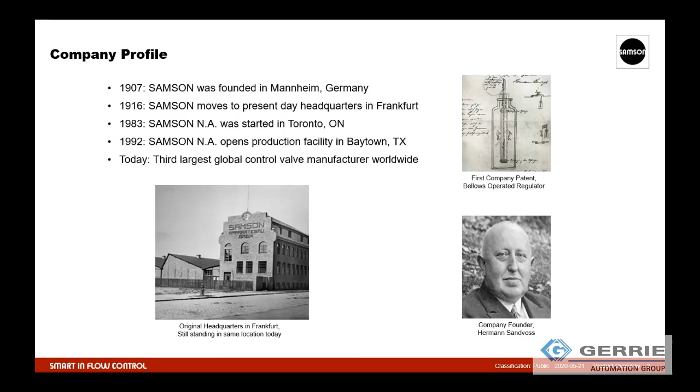From a production standpoint, again, being able to take care of the North American market, we realized that we need more ANSI flanges, for example, than DIN flanges. We need more CSA products than European approvals. So as such, they opened up a production facility in Baytown, Texas in 1992. So a lot of the products that we bring into Canada right now come from either Germany or from the US, from Baytown, Texas. To date, we are the third largest global control valve manufacturer worldwide.

So we're an independently owned company, and again, we're a worldwide company. I always like to mention this for a few reasons. One thing is that we're not a new company. As I said, we've been around for over 100 years now. We're very stable, even in the current marketplace economic situation that we're in, we're still a very stable company.

But what's also important is that if you have equipment that you as a customer or your customer's manufacturing that's going into another country, we have Samson subsidiary offices around the world, in China, Russia, Europe, India, Africa, Australia. So the reason why I mention this is we see it all the time. Equipment comes over here and we're able to service it. It comes in from Europe or China, and we're able to service it for our customers, and vice versa.

We had a situation last year where a customer had built a product on a skid here, sent it off to Romania. They had an issue with it, and we were able to contact that subsidiary office in Romania, have them send a technician to take care of the valve.

We started in Europe, obviously, and as such, some of our core competencies and strengths revolved around that market. So chemical, petrochemical, oil and gas, refinery, industrial gases, these are things that we've been doing for many, many years. So if you think of liquid natural gas, for example, and the industrial gases and cryogenics, that's something we have very specific valves that work on.

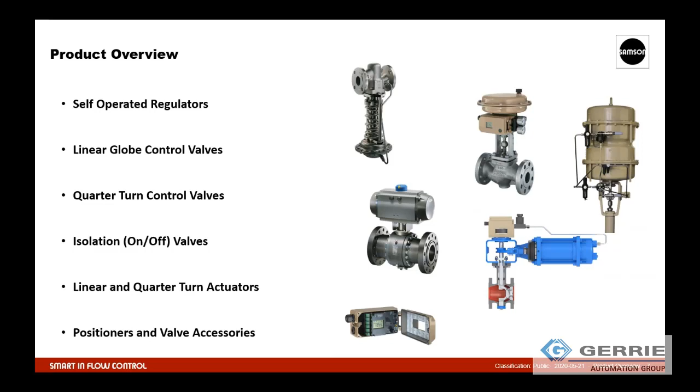So just to give a brief product overview, these are some of the points that I'm going to touch on as we go through this. Self-operated regulators; linear control valves, why are we still using them? Quarter turn control valves, what are the applications for them, the differences between them and linear? Isolation valves, linear and quarter turn actuators, and finally positioners and accessories.

So a self-operated regulator. In essence, a self-operated regulator is just that. It's what we like to say, a set it and forget it. It's a mechanical device. You don't require any external 4 to 20 signal or any air operation or anything like that. It basically uses the line pressure or temperature and then mechanically regulates to where you need to be. So some applications where you would see this is where a customer has something in a remote location where they don't want to touch it, or the line temperature or line pressure just needs to be kept at a constant. So those are examples where you would use this.

In 2020, as Mitchell mentioned earlier, we talk about what Endress+Hauser and Rockwell have to offer. We're really talking about digital and control. So from a control valve perspective, we see a lot more control now than we ever have. People want 4 to 20. People want to be able to make the valves open and close and not just leave them. But surprisingly, there's still a fair amount of applications where self-operated regulators are required.

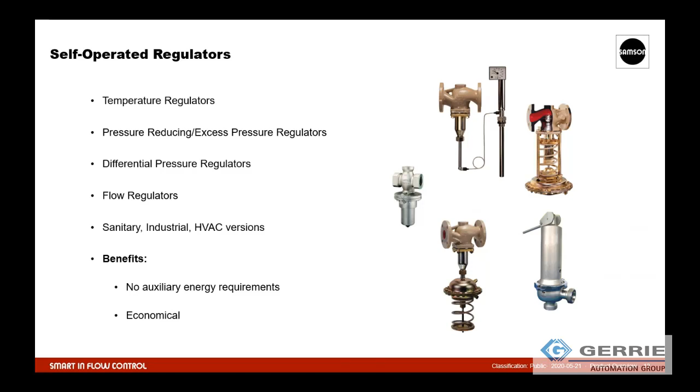So I'm just going to touch on these briefly. The two that are probably the most common are the pressure regulators. In essence, what you have is a pressure port on the upstream or downstream of the valve body. And depending on what fluctuation that has, whether it increases or decreases, it then comes into, if you notice here, that's your diaphragm. It's fed into the diaphragm and then makes an adjustment based on how much pressure is needed to either open or close the valve. That's how the regulator works, whether it's the pressure or temperature styles.

We can go up to 4-inch, we can go higher for specialty applications. ANSI 150 to 300, different body materials available, different diaphragm materials are available also for different pressures, for example, or sometimes higher vibrations. And you can have a set point up to 400 PSIG. One thing to note is that the valve body here and also on the temperature regulators are the same valve bodies that we use in our globe valves. The reason for that is it's very modular. There's nothing overly special if you need to maintain it. It's a lot of the parts that we use on the globe valves already.

The temperature regulator is very much the same as the pressure. The difference is now we have a thermometer or some type of thermostat, where basically as the temperature increases, there's a thermal oil that expands, not unlike a thermometer we're used to, and it would either move the plug up or down. So we have different variations depending on what the application calls for. We can go up to 10-inch, 150, 300 pound. Again, we can go into specialty materials if need be. Set point range from -10 to 250 degrees C. We can go higher depending on specialty applications.

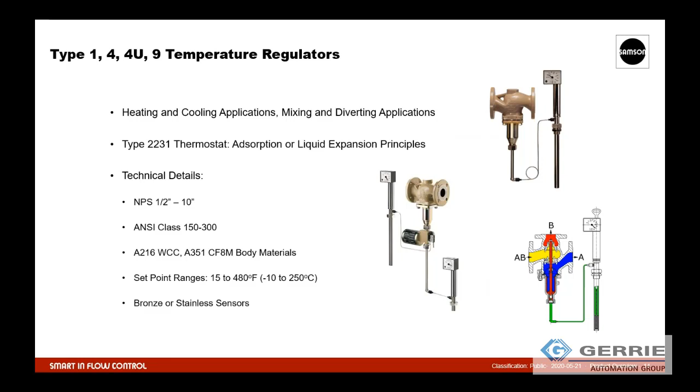If I draw your attention to this little picture in the bottom right-hand corner, this is one where we're actually taking the inlet, in this case AB, and a certain amount is going through A and a certain amount is going through B. So whether we're doing a cooling application or a heating application, this could be something that's controlled with that regulator.

I'm going to talk about linear control valves now. I'm going to go through a fair amount of this. Linear control valves, or globe control valves, are actually very versatile. One of the reasons why they're still so widely used today is because you can use them on different applications. Liquid, gases, a combination of that, for example cryogenics, as I mentioned earlier; steam is something that we use on this. But the other main thing is that it gives you really good controllability.

So I'm briefly going to talk about some of the globe control valves we have that are most common for us. We have what's called our 3241 globe valve. That's really the most standard that we have, and what I mean is it's the most common. We use it for steam, again, water, cryogenic applications. We can go from a 1/2 inch to 12 inch, 125 ANSI class to 300.

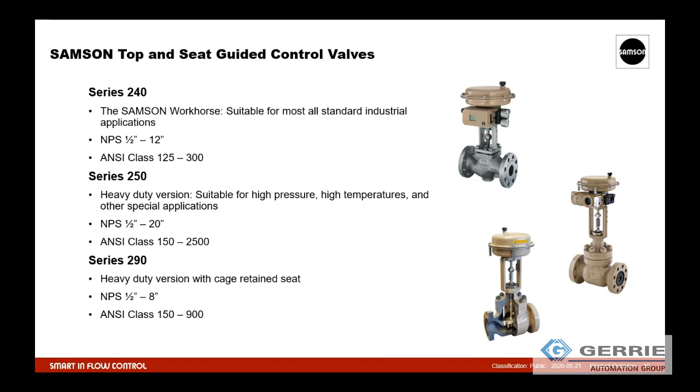Most of the valves that you're going to see from a globe standpoint will be a straight through. You come in on what we call the A side, you go out on the B side. There are applications where you want to put an angle style valve. Usually for severe applications, potentially if you have flashing or cavitation, which I will touch base on, or if you just have a piping configuration, if it's an elbow in the corner and you have room to put the valve, that might be a reason to do that.

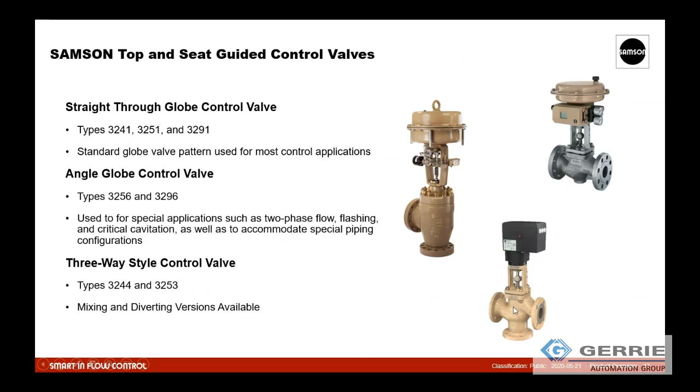All right. One of the things that Samson prides itself on, and one of the main things of our design, is we try and be modular, and I'll show the modularity, and I'm going to talk about reduced maintenance, but I think the key word to take away here is reduced. We try and reduce the size of the valve, we try and reduce the maintenance, we try and reduce the amount of pieces, because in essence what we're doing is reducing the amount of times that a customer or technician has to go and actually spend time on the valve.

A valve is a mechanical device. It's going to wear. It's like our cars. They all need maintenance. What we at Samson have tried to do, and very successfully I think done, is with our modular design, we're able to reduce the time that the valve is out of the production line. Okay, so I'm going to touch base on some of those points specifically.

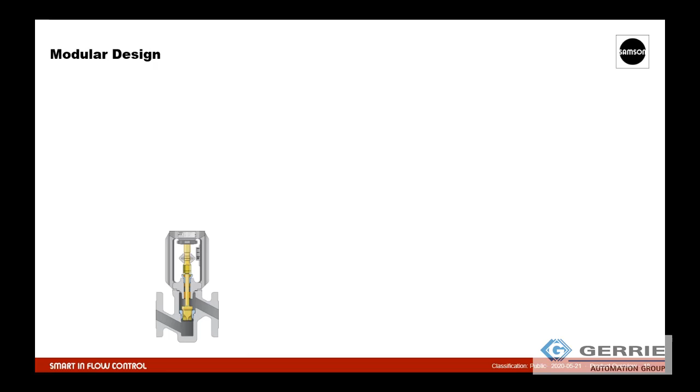Next, you have what's called the bonnet. And the purpose of the bonnet is to connect the valve body and the plug to the actuator, which is coming in a moment, which is right here, okay? This is a very simple setup of a valve, but in essence, that's all you would need. Valve body, plug, seat, and some type of actuator. And the purpose of the actuator is to move the plug up and down in the seat, depending on the flow rate and control that you need.

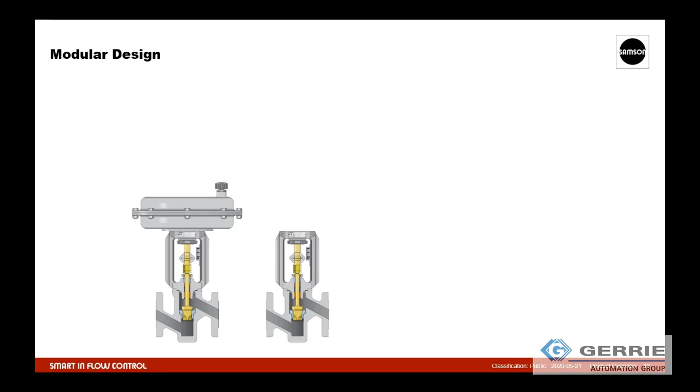So here's another situation. You see the same thing, but yourself or the customer has come back and said, well, I actually want a positioner on there. The beauty of our design is, as you can see here, nothing has changed. The bonnet's the same, the valve body, down to the plug. But now we've just changed the actuator design. And by just putting on a different type actuator, we now have a positioner that's mounted on there as well. Okay, but nothing else below that positioner has changed.

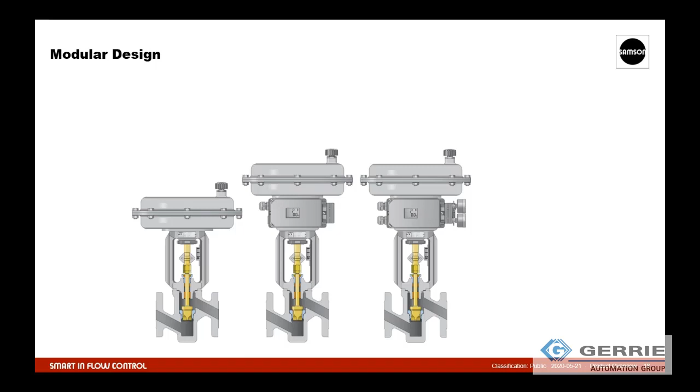Same thing here. I'll just comment that all we've done is added a gauge block on the positioner, but everything else is the same. So you can see up to this point, everything's the same, but, you know, hey, Chris, I bought this valve and I need a manual override on the valve. So all we have to do is, oh, pardon me, is add that to the top. So again, nothing of this below here is changed from there to there.

So you can imagine from stocking pieces, you can imagine from designs of other valves, if these changes need to be made, they may need to be sent back to the factory. They might be sent back to the manufacturer. It may have to sit in the shop until pieces come in. You can see ours is very simple to work on.

And then lastly, in this case, we're going to add a bellows, which I'll talk about in a minute or two. But the valve body, the plug, seat, the bonnet, the positioner's changed a little again. We've just added some accessories, but it's the same positioner and it's the same actuator at the top.

So think of it from a spare parts concept. Think of it from everything that you would need to maintain or work on this valve. You don't have to replace the entire valve. You can just replace the pieces that you need. And again, I use the word reduce. We pride ourselves on reducing the amount of pieces that are needed to work on the valve and to get the valve operational and back in service.

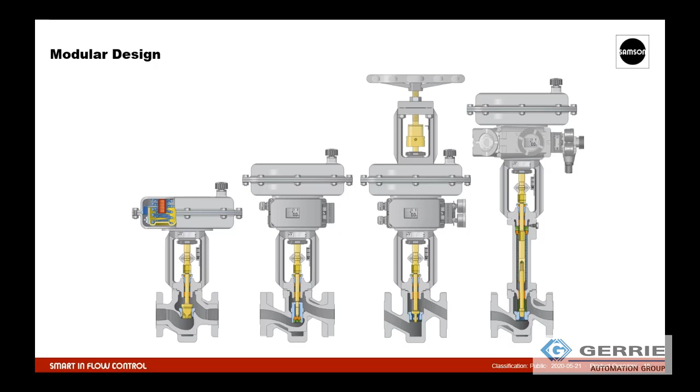So just quickly now, if we look at the valve bodies going from left to right, you can see that we're changing the plugs and the seats and the valve bodies, but that nothing else above those has changed. So again, the same point that I mentioned before. So this gives you a better idea from a spare parts side of things of how we work our modularity and our reduced maintenance in.

Now I'll stop for a moment because I'm going to use the term CV a lot. CV in essence is the ability to put flow through the valve body. It's a calculation, it's a coefficient, it's a little specific. The number itself isn't as important as understanding the magnitude of the number. So a small CV means a small amount of capacity that can go through the valve body. A larger CV number means there's more flow capacity that can go through that. And that would be for the same valve size, for example.

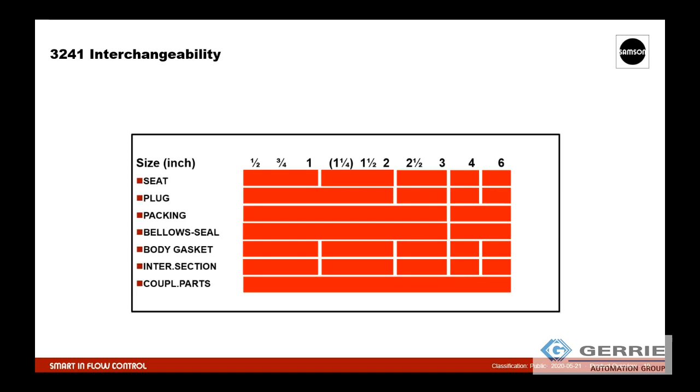So again, you don't have to contact our good friends at Gerrie. You don't have to contact your stores and try and get more parts. You can use the existing parts you have in stores.

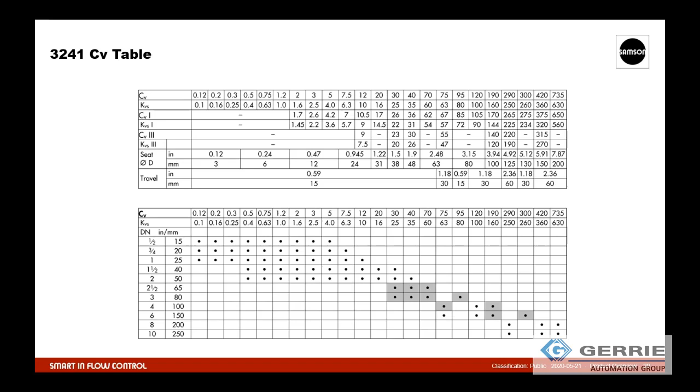A lot of other designs, I mentioned cage retained earlier, for example. A lot of other designs have multiple parts. They can have up to 14 or 15 parts in that spare parts kit. So obviously trying to maintain this assembly is a lot easier, a lot simpler, a lot faster.

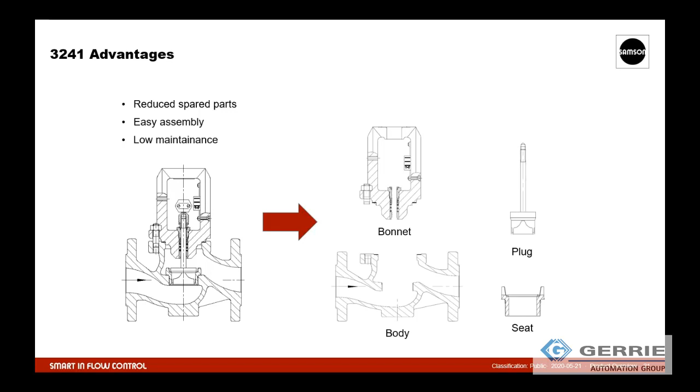So you can see here that as this plug goes up and down, there's a potential for process to get in here and come out the top, come out this portion of the bonnet, which obviously, depending on what that is, you don't want. You don't want your valve leaking, but you also don't want that getting into the environment. This packing is a wear point. There's a plug here that's going up and down, and eventually it's going to wear, and it doesn't matter whose design or who the manufacturer is, everyone's packing will need to be replaced at some point.

What we've done with our packing is we have what's called a self-retained design. Traditionally, a packing gets put in, and it's usually graphite or PTFE or some type of carbon fiber, and it's packed down, hence the word packing, with a nut. That's this blue portion up here, and it's tightened down. Over time, the packing is going to start to wear. As the packing wears, you have to tighten down the nut some more to get more compression, until you get to a point where you can no longer pack it down, at which point the packing needs to be replaced.

Okay. What we've done is twofold. One is we've come up with these V shapes or V ring, and basically that acts as kind of its own compression. You can imagine if you have a bunch of pie plates, how they all come together. So it's a much tighter fit, much tighter compression.

The other thing that we've done is we've actually put a spring in here. So it's spring loaded, which means once you tighten down this nut, you don't have to go back and adjust it. That's a real big advantage to this. Again, low maintenance, reducing the amount of times we have to touch the valve. So once this is tightened, you don't have to go and change it. Should you see any type of leak come out of there, it means that the packing is completely gone and you do need to replace it.

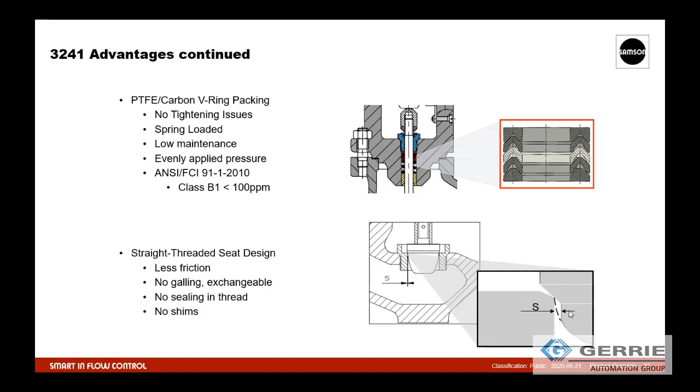Some of the advantages to the seat assembly is that we have less friction. We're not sealing against the threads. We're actually sealing against the body itself. There's no shims and so forth. So it gives us a nice clean seal against the valve, the plug to the seat, sorry.

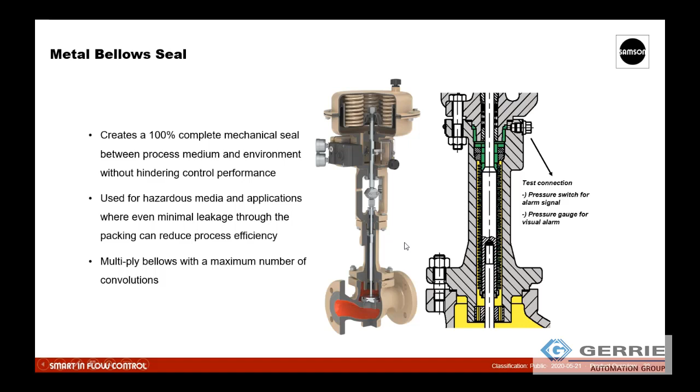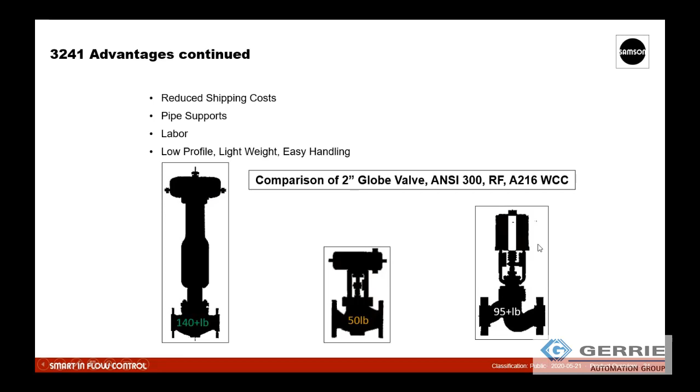One of the ways we can do this, and I'm just going to jump back for a second. If you notice this design here of the very, very large one to the far left, the reason why it's so high is it has one very large spring here that works on the actuator. This design as well has a very large spring. When you look at our design, what we have in our actuator is actually multiple springs. We can start with as low as 3 and go up as high as 18.

And how we do this is, if you're familiar with the Russian doll, where there's a doll inside a doll, and it just gets larger and larger, we have the same thing. So we can put different springs inside of springs, up to 18 springs inside one actuator. So this allows us to keep things more compact, because if you needed to increase your size or change your range, you don't have to change one spring and hence change the size of the actuator necessarily. It might just be as simple as adding more springs, which is very simple to do.

It also allows us for less hysteresis. And what I mean by that, the best way to describe hysteresis is from the time a signal comes in, a pressure signal or digital signal comes into the valve, how long does it take to actually react to start moving before it gets to set point? On one large spring, you can imagine that it takes a little bit longer because you have to overcome those forces on that spring. With multiple smaller springs, it actually reacts much quicker. So that's one of the nice advantages.

The other thing is with multiple springs, you actually get a longer life out of the diaphragm. And the reason for that is you're not putting pressure on one point. You're doing pressure all the way around the diaphragm itself, and you're distributing it evenly.

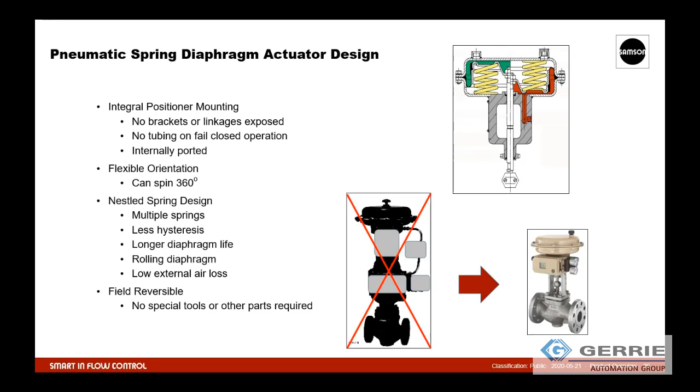So far, we talked about pneumatic actuators. I'm going to talk about electric real quick. So there are instances where people would require an electric actuator. And for those of us that have some of the instrumentation or electrical background, an electric actuator is basically a motor with gears that takes different voltages, 24 volt, 110, 220, and so forth.

So instead of just making a very large electric motor, what we've done is we've taken an electric motor with a hydraulic piston inside. So you get to a certain point, like a hybrid car, where you just flip from one to the other. It's the same thing with the electric hydraulic actuator. You get to a certain point where you have to get into the piston, which gives you that extra thrust to get up to the 7.3.

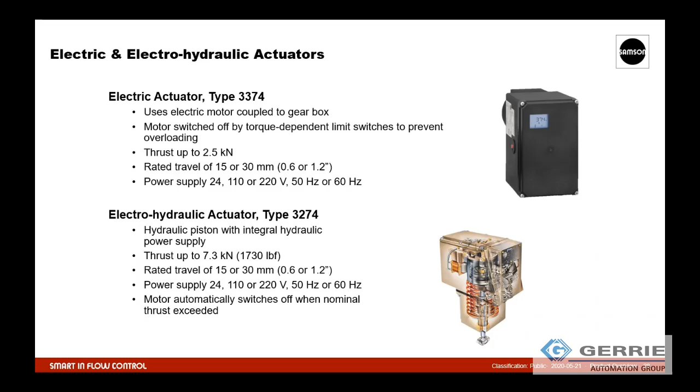And what happens is when you come into the valve, there's a pressure drop. And in that pressure drop, the pressure can go below the vapor pressure. This is why it starts changing state. As you come out of the valve body, you actually recover that pressure. So cavitation is, you haven't quite changed state yet, but as you start to get into that recovery, those little bubbles start imploding and they cause damage to the valve.

Flashing is you've gone all the way. You've gone from a liquid to a gas. So in this case, you have bigger issues to contend with as well, because you started with a liquid, you now have a gas, right? Which can still cause issues on the throttling. It creates additional noise and can cause damage to the valves.

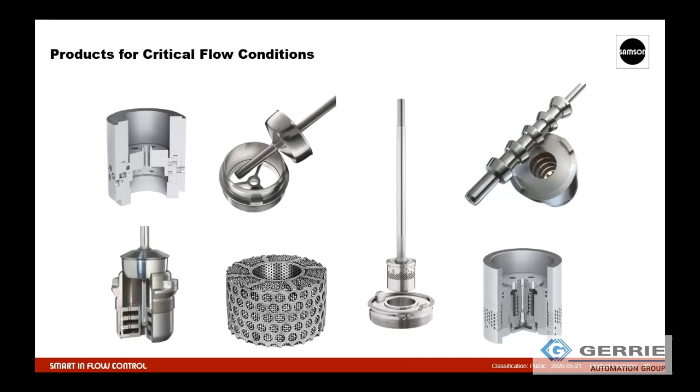Well, how you deal with that is you actually use different plug and seat assemblies to reduce the velocity of the flow coming in. And as doing so, you're manipulating the pressure drop across. The pressure drop that happens in here, okay?

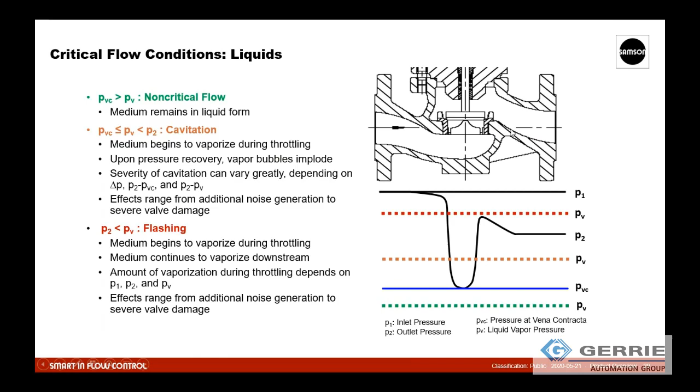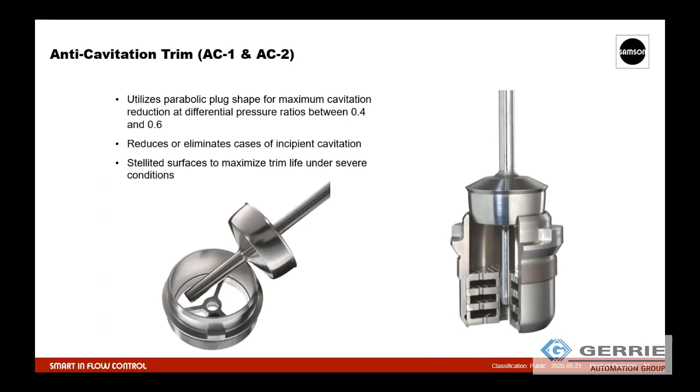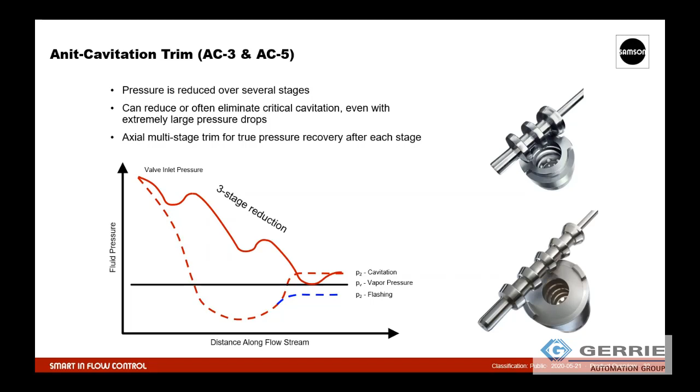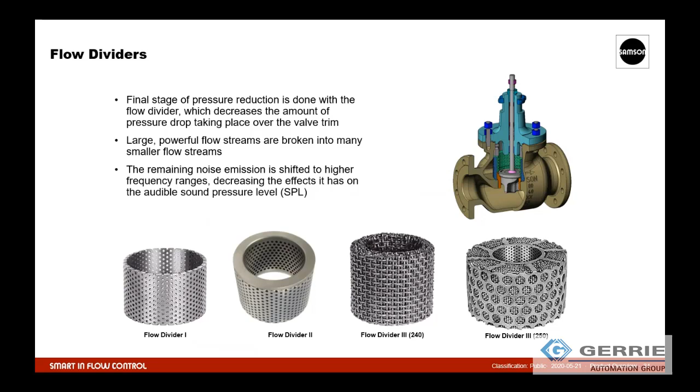The ones I showed previously were for liquid; these would be the ones we would use for gas. And again, I'm not going to go into too much detail. You can see that they do the same thing. If the flow comes in here, you reduce the velocity, and as such, you're reducing the impact of noise, cavitation, and any type of flashing that happens. Here's another example of one. We're just manipulating it on the downstream instead of right in the valve body or the upstream.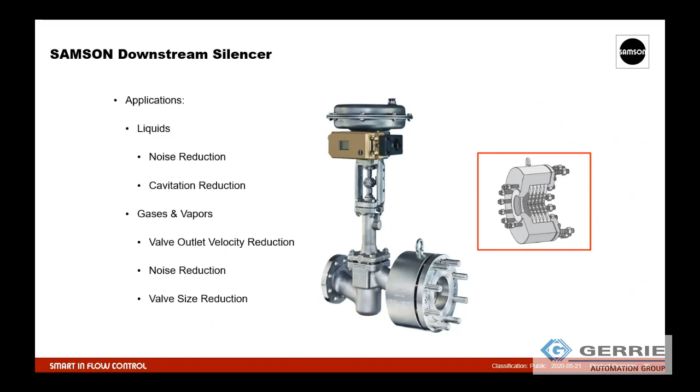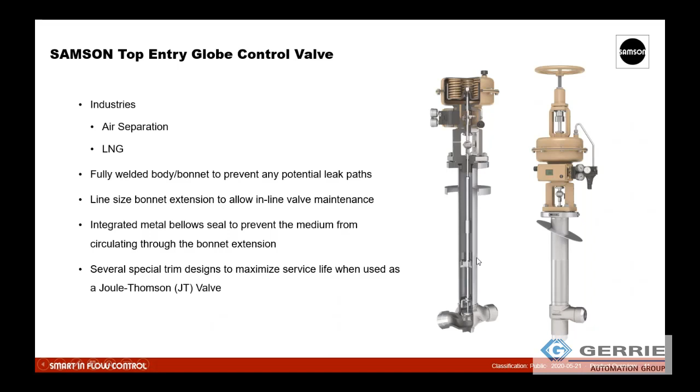I mentioned earlier that we can do specialty gases. So for air separation, liquid natural gas, this is how it's done. If any of you are familiar, a lot of cryogenic applications are in what's called a cold box. And as such, the valve is submerged into that, and this whole area is completely iced up. So should the valve need to be worked on, you're not in a position where you can go in and work on the valve. So our design allows you to basically take out the plug and seat assembly without having to get all the way into the bottom of the valve body.

This is another specialty type of globe valve we have. I'm not going to spend a lot of time on it, but if anyone has any questions on this, please feel free to reach out to Mitch or myself.

This is basically a de-superheater valve. And what it does is it takes superheated steam, injects water into it, which brings it down, not quite to saturated steam, but starts cooling it to a de-superheated steam that can then be used in the process. Large industrial facilities is where you'll see this. Large steel mills, for example, where they're trying to move a lot of steam throughout the plant, and then they need to cool it down by injecting water to get it to a point that it can be used for an application.

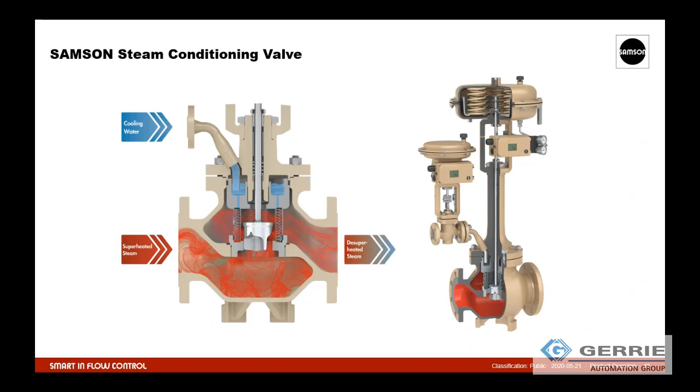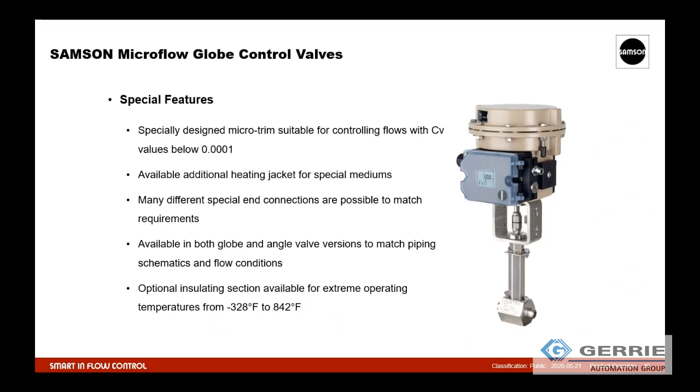Very low flows we can do as well, a micro flow control valve. And this is one where literally we're talking about a CV of 0.0001. So you can imagine the flow capacity through there, and the plug itself is very similar to a needle. So we can do very small flows. Applications for this would be if you're doing injection, so chemical injection or any type of additive ingredient injection, that might be where you'd want to use this.

Went through that. I know I spent a lot of time on the globe control valve. The reason for that, and I will go through the rest of this relatively quickly, is that it's still the most versatile. Now, one of the downfalls of the globe valve is that because of its body style, you can only get so much CV. There's only so much capacity you can get through that. So you think of a 4-inch valve, you can only get so much capacity through that.

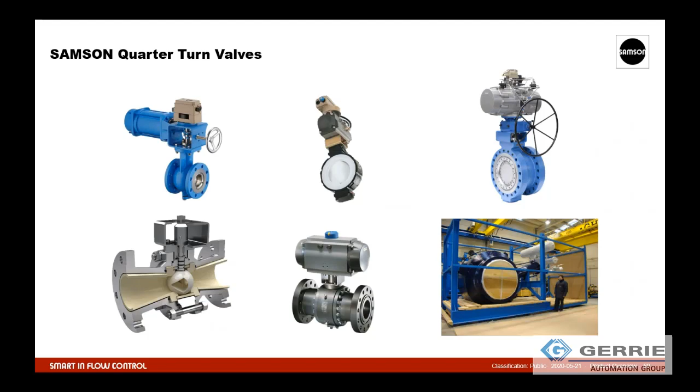So what do you do if you want good controllability, but you still want to get a higher CV value? You need to get a higher amount through that valve. Well, you can look at quarter turn valves. And the first one I'm going to talk about is what's called a rotary plug valve. So if you just focus on this picture at the bottom here, you can see it basically looks like somebody took a ball valve and cut it open. And in essence, that's what's been done here.

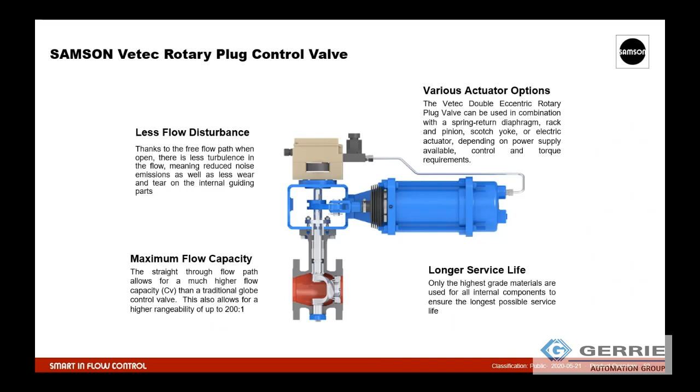So you can imagine when this is open, and because it's a quarter turn, you only have to turn it 90 degrees to get it fully open. But you can imagine when that's at 90 degrees now, the amount of flow that's going through that. It's almost the entire valve body, or full bore, as they say, worth of flow. So that's one of the advantages of a rotary plug valve.

The beauty of the rotary plug valve as well is that the face-to-face dimensions of this valve are actually set up to be the same face-to-face dimensions of a globe valve. So you can take these rotary plugs and put them into globe valve applications should you require a higher CV. The globe valve is going to give you the best controllability and best performance. The second best you're going to get is the rotary plug valve. Okay, still a high degree of controllability.

And how we're able to do that is because we've got this double offset. Basically the center is offset slightly from the body and slightly from the center line. This allows us to, the moment the plug lifts off the seat, it's no longer in contact with the valve body, and it's no longer in contact with the seat. This gives us a high degree of controllability now. This also eliminates any friction during the operation. There is no friction.

With low friction, we're able to get way less wear out of it. Again, we want to reduce the amount of times you need to touch the valve. So reduced wear on the valve. We can actually get away with a much smaller actuator as well, because you have a lot less torque that's required. The other beauty of this design is if you look at the bottom right picture, you can see that even at fully open, there's still a path for product to get around the plug through the valve body.

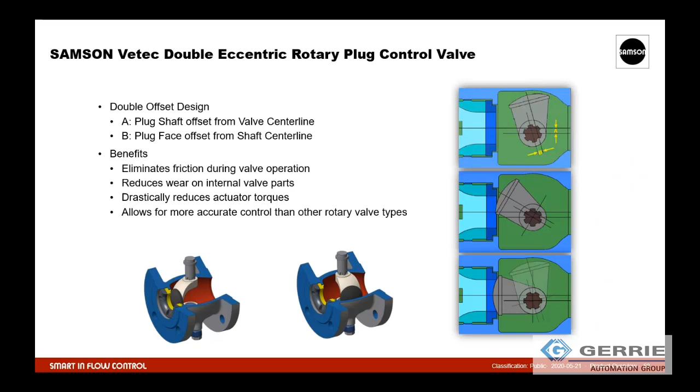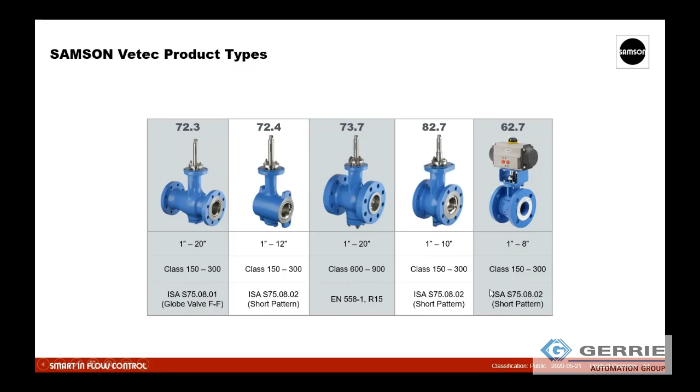This is good if you have slurry applications. You know, Mitch and I had an application where we dealt with a rendering plant where they were looking at this valve because of their slurries. So that's another good application for using this. Just to show you quickly, the point of showing you this here is that they have the globe valve face-to-faces, okay? ISA patterns as well. And depending on the application that you need, we can advise what type of actuator to put on.

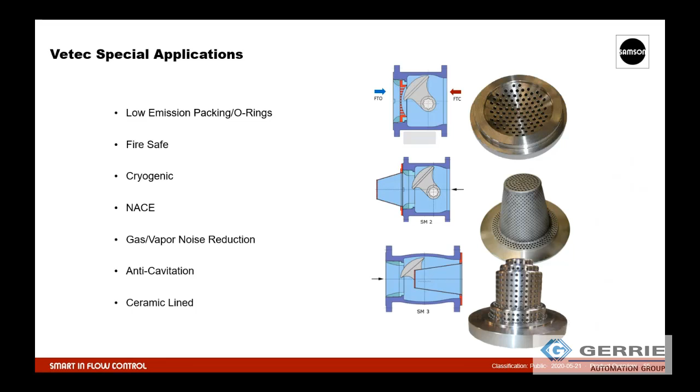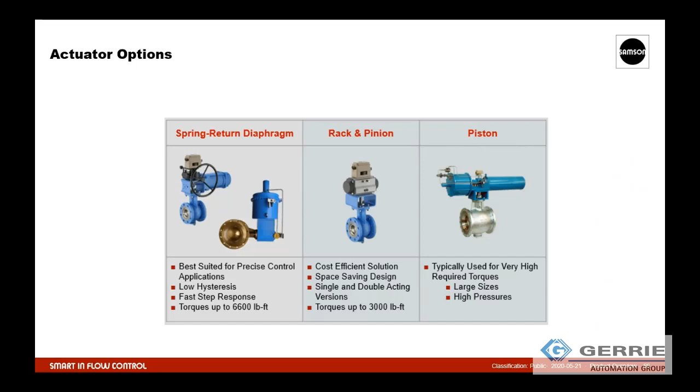We have different types of actuators: spring return, rack and pinion, and piston. The most common and accurate is spring return. Rack and pinion is really one if you don't need as much controllability. And then piston is for the higher torques and pressures. On the rotary valve front, we also have what's called a segmented ball valve. And a segmented ball valve is just that. We've cut a section of the ball out.

Typically, a ball valve is not great for controllability. It's great for on and off. By making this little adjustment here, we're actually giving it a flow control characteristic. So now you can use it for flow control situations, not only just on-off. You may have heard it called a V-notch or a V-ball. That's the same idea

as this. So different pressure classes, we can go up as high as 12-inch. Specialty materials are available if need be. So you can imagine the CV through this is, again, higher than what you'd see in a globe valve.

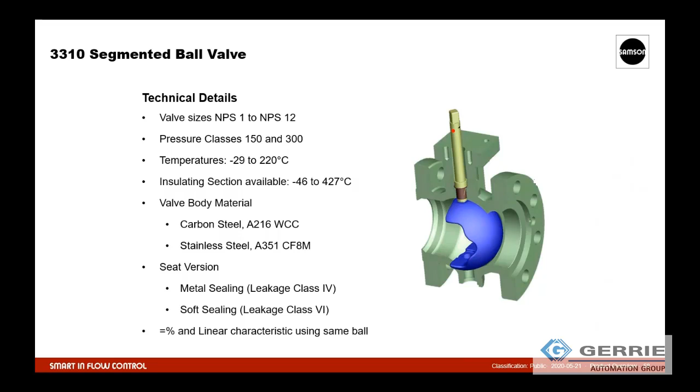Now we're going to talk about butterfly valves. When we talk about butterfly valves, at Samson, we talk about high performance control butterfly valves. We do have some butterfly valves for on-off, but the majority of what we deal with are high control and high performance butterfly valves. Typically a butterfly valve, you can imagine, one of the biggest advantages is very high CV. Because if you have a 4-inch, you're almost getting a full bore 4-inch through that valve.

Some of the issues with butterfly valves in the past have been the controllability. It doesn't give you great control. And a lot of that has been the friction between the disc to the seat and how it operates. So there's what's called a triple offset design. And I'm not going to get into too much of the specifics, except to understand that there's an offset from this point. It's the first offset. The second offset is just offset from the seat. And the third is it's just offset from the center a little bit.

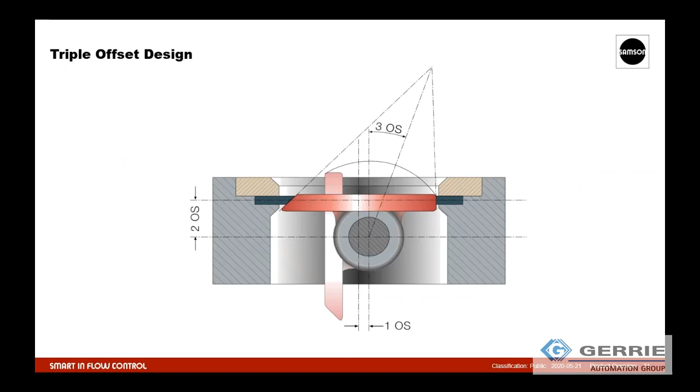What this is meant to do is eliminate those frictions. So it eliminates the friction on opening. It eliminates the friction on closing. It actually gives you better controllability when the valve is open. There's usually more hysteresis when it hits the seat when you don't have a triple offset. With a triple offset, you've now reduced, if not eliminated, that hysteresis. So that's one of the great advantages of a triple offset butterfly.

The other nice advantage of our butterfly is that traditionally, if you're going to have to replace anything on a butterfly valve, it's going to be the seat. The seat is your wear point. With a lot of designs, what happens is you have to bring the entire valve assembly into a shop and you have to tear it apart, including removing the disc, just to get at the seat. This is a lot of work. It's very laborious and so forth.

This gives you the opportunity to do this in the field, or not necessarily in the field, but in your shop. It doesn't have to be taken and shipped out somewhere or sent out anywhere. It can be done in our shop. It can be done in your shop.

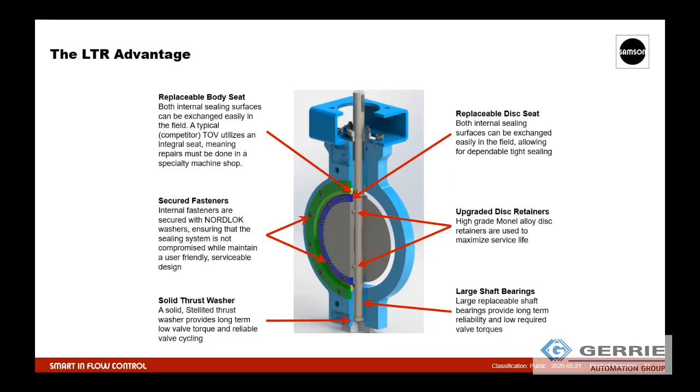So different sizes, 3-inch to 120-inch, 150 to 2,500 pound pressure classes, different materials of construction. Again, the real advantage of a butterfly valve is, if you can imagine a 12-inch globe valve, as much as the globe valve is going to give you great controllability, at 12-inch, it's a very, very large valve. A butterfly valve has probably got a face-to-face at 12-inch of probably 12-inch or less.

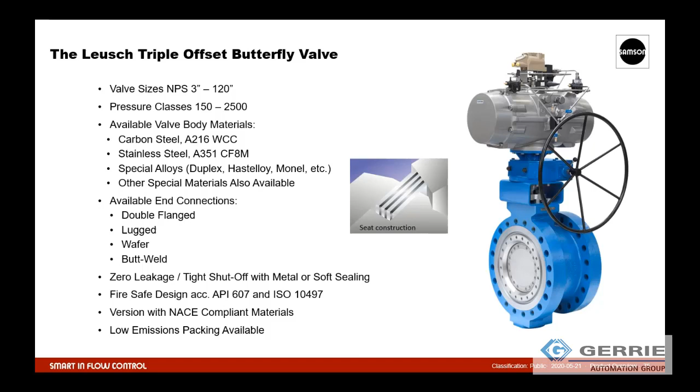So this is why you see a lot of butterfly valves in water, wastewater applications, because their piping is so big. 24-inch, I've seen a 60-inch butterfly valve as well. So those are a lot of applications. Again, traditionally, it's been used for on-off, not controllability. Now with triple and double offsets, you can get controllability. Different types of connections, wafer, lugs, double flange, butt weld, depending on what type of connection you're looking at and what the application calls for.

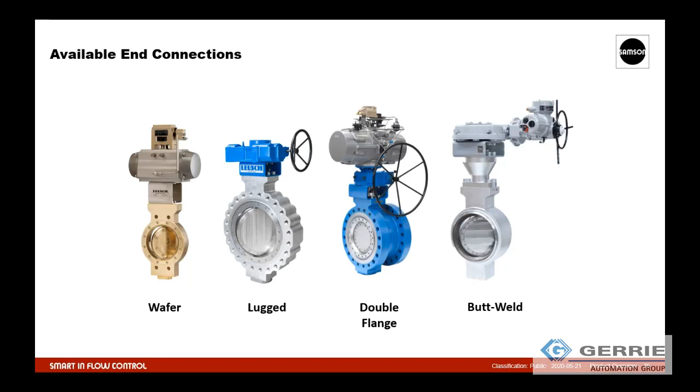Like we mentioned before, with all the valves, you can have cavitation and noise issues. In this case, we just take those velocity diversion plates, and we have them actually mounted on the disc itself. Does the same thing, reduces the velocity, manipulates the pressure drop so that we don't have any cavitation or flashing issues.

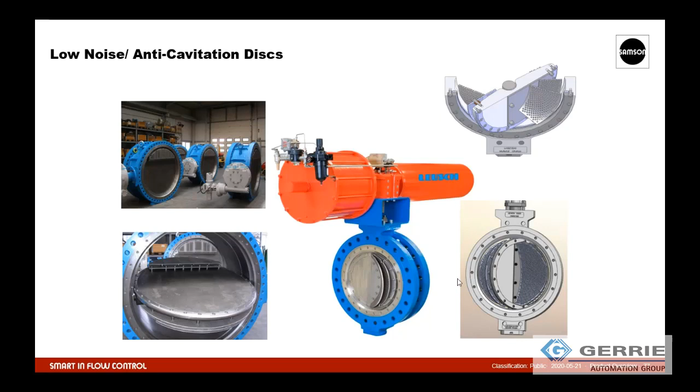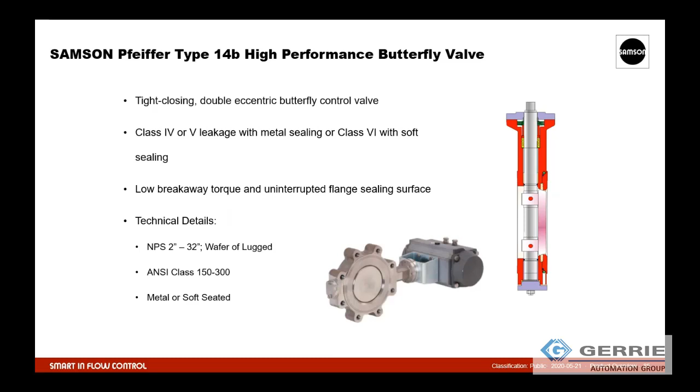Other types of butterfly valves that we have, again, now we have a double eccentric, or double offset, just 2 offsets instead of 3, still good for controllability, okay? A lot of applications for these, again, you're looking at on-off, or ones where you want a very high CV rate, where you can live with the reduced controllability versus CV.

We can also do these in Teflon coated. So Teflon coating would be if you have high abrasion, high corrosion. Chemicals, for example, might be an application where you'd want to look at this.

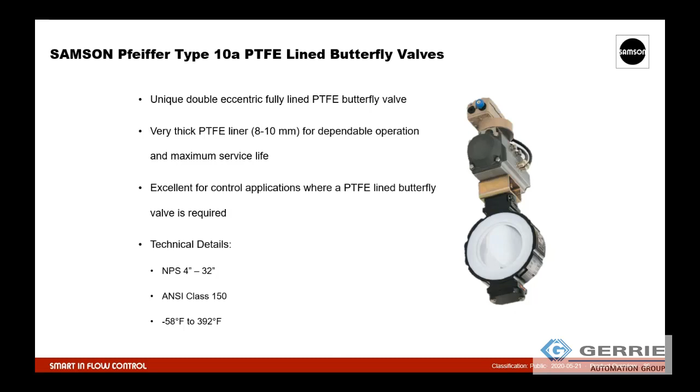One of the nice advantages of our design compared to other designs is that we have the thickest Teflon liner in the market, which means you're going to get a longer life out of it because we're talking about chemical abrasion and physical erosion to that liner. And if it's a little thicker, obviously it's going to last a lot longer. Most designs are about 3 millimeters and ours are between 8 and 10 millimeters.

We can also do a Teflon coated globe valve. Not very common, but we have seen it as well. Some of the applications where you'd want to look at Teflon coating just in general: bromine, chlorine acid, sulfuric acid, mixed acids, different types of chlorides, mining applications as well. Sometimes you get high abrasion.

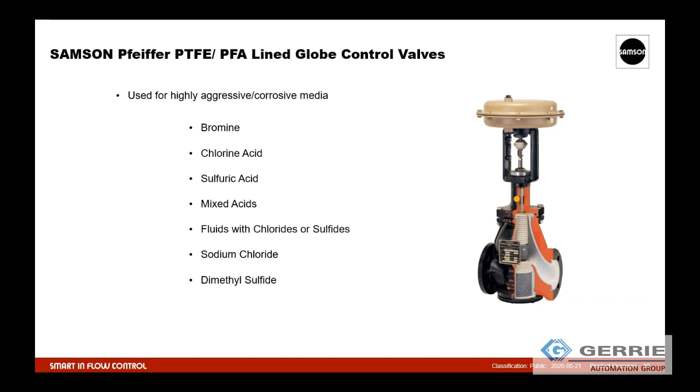When you get into really high abrasion applications, though, something to consider would be something a little bit more than a Teflon, and I'll talk about that in a moment. We can also do a PTFE or PFA lined ball valve for those types of applications.

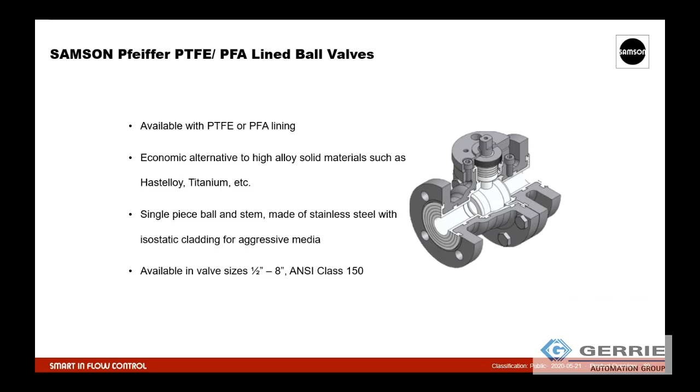When you get into, and I'm going to use mining as a good example, you have tailings, for example, or rock particles that are going through. Even on a Teflon liner, eventually that's going to erode the liner. Should you want an application where you want to put a valve in and get a very long life out of it, something to consider is a ceramic lined valve, ceramic lined ball valve or ceramic disc valve.

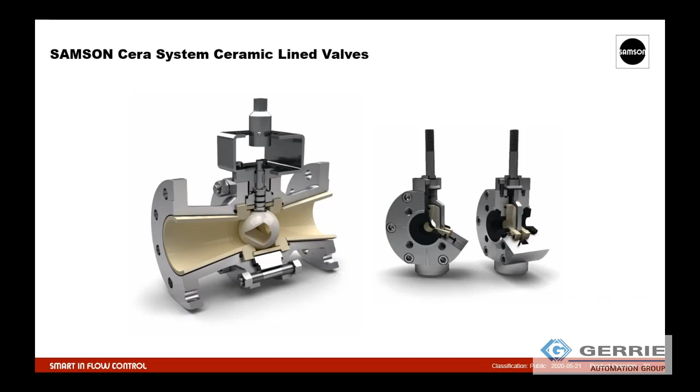The advantage of the ceramic is obviously the hardness. I always like to use the analogy, if you think of a metal plate and you take your fork to a metal plate, you know what's going to happen to it. It's going to start to eat away at it. If you take your fork to a ceramic plate and do the same thing, it's going to last a lot longer, and it's going to be a lot harder. So very hard applications is where you would use it. A lot less maintenance as well.

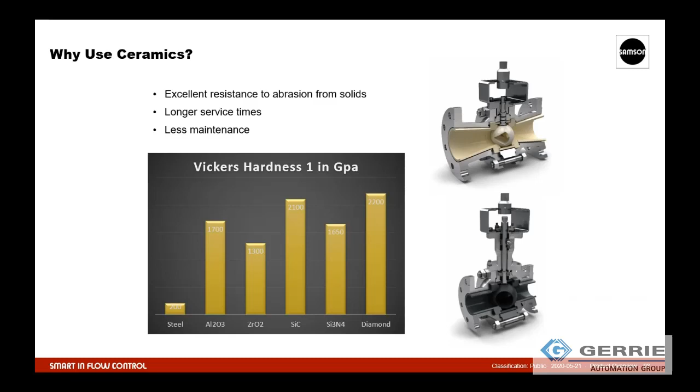Just going to go back. One of the nice things about this design is that it's a three-piece design, which means you can take the valve out of service, you can take it apart and replace individual pieces. You can replace the ball, you can replace the liner on the inlet and outlet, you can replace the packing and all that. You don't have to send it away to the factory to be done. It's very simple to replace pieces on this.

A good example would be, we had a customer that on the outlet had found a wear point on the ceramic where it was starting to wear down. But on the inlet, they didn't see a wear point at all. So all they did was take apart the valve. These two pieces were identical in size. They just moved the outlet ceramic liner to where the inlet ceramic liner was, and now they just got double the life out of their valve because they know how long that one point's going to wear.

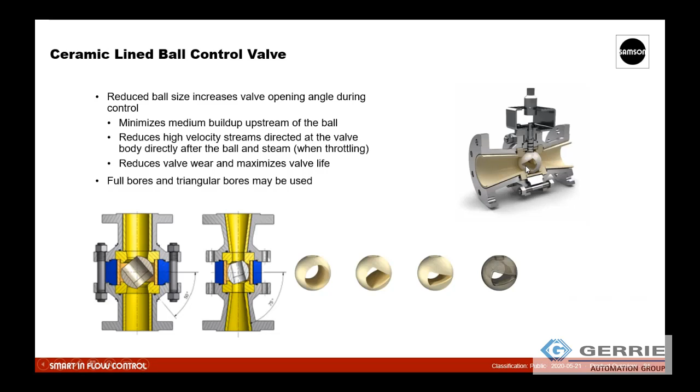You see, we have different ball styles depending on the type of controllability that you're looking for that we can do as well. So again, it's not meant to be on-off. This little V-shaped triangle, if you will, is to give you good controllability and throttling through the valve.

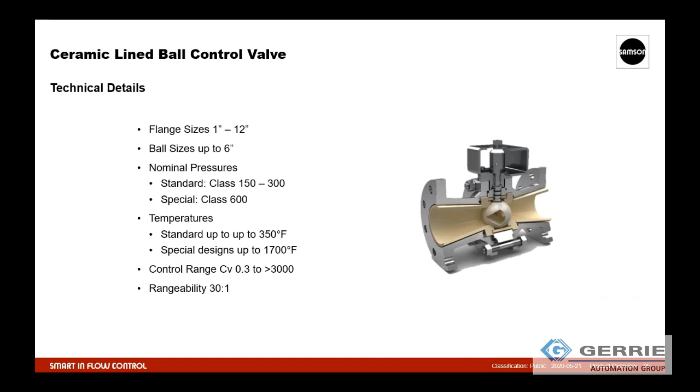Different sizes, 1 to 12 inch, different pressure ratings, high temperature ratings are available as well. But again, high chemical or very, very corrosive chemical or very abrasive applications, high erosion, that's where you'd want to consider using these types of ceramic valves.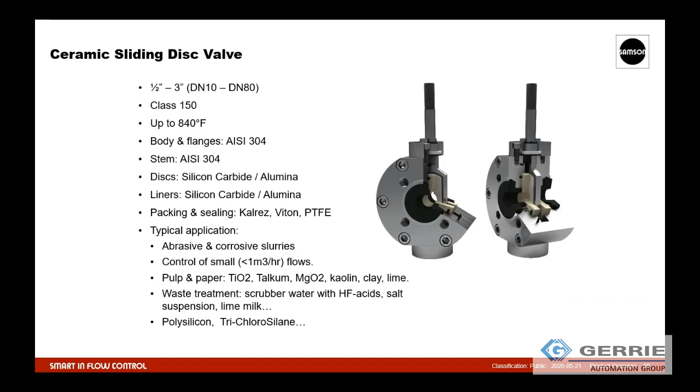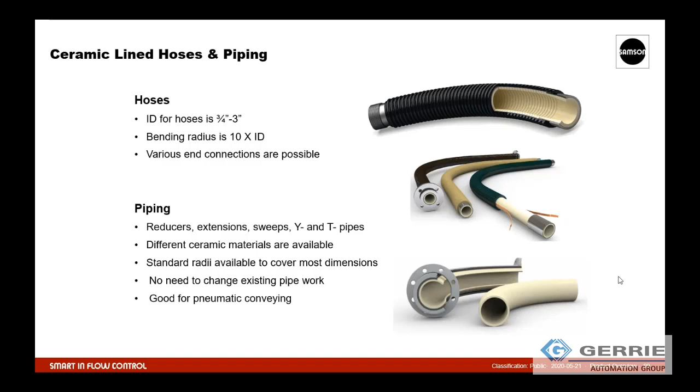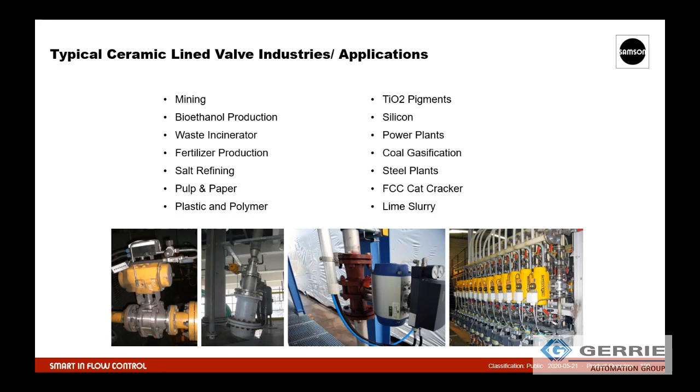We talked about the different applications: mining, bioethanol, fertilizer, salt is a good one, plastics and polymers, lime slurry. We've had a lot of experience with lime slurry using ceramic valves as well. Okay.

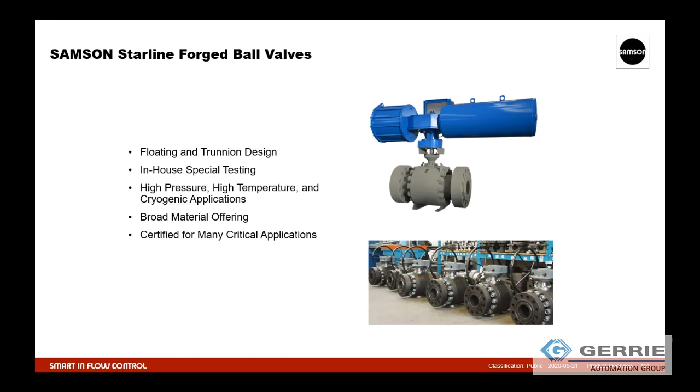Lastly, on the valves, I want to talk about the forged ball valves. We have a line of ball valves, floating and trunnion design, that are specifically designed for heavy industry, heavy chemical and oil and gas industries. So higher temperatures, higher pressures, you can see it's a very beefed up body, very large actuator as well. So we do have the capability of doing those as well.

Positioners and accessories. So far, everything we've talked about has been a valve. A valve is a relatively dumb device. It is a dumb device because it only does what we tell it to do. If we put air to it, it's going to open or close. How much it opens and closes depends on how much air we put into it, or an electrical signal, vice versa. What's required is something to be a little bit more accurate for the valve. In this case, it's called a positioner.

The positioner mounts on the valve, and what the positioner does is it not only gives you feedback, but it actually controls things. A good example would be if you're trying to control a valve at 50% open, and you send 50% air to the valve, and you're just assuming it's 50% open, but you really don't know. It might only be 48% open.

Well, why is that? Well, maybe there's a break in the airline somewhere, so you're not getting a full 50% of the air to the actuator. Maybe there's a plug and seat issue because of erosion. Could be 10 or 12 different things. By having a positioner on there, all it knows is, oh, you want 50%. It now decides for you how much air is required to open or close the valve 50%. It can also give you feedback as well. So different types of positioners for different applications.

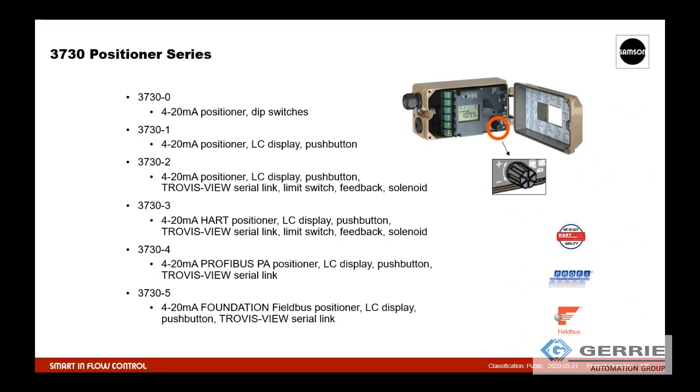I talked about some of the feedback you can have. So you can have position feedback, binary feedback, binary switches, leakage sensor, for example. If there's any air leakage, it will tell you that. If there's an external sensor that's needed to be plugged into the valve, it can have that. Solenoids, if you want alarms or switching to be happening as well.

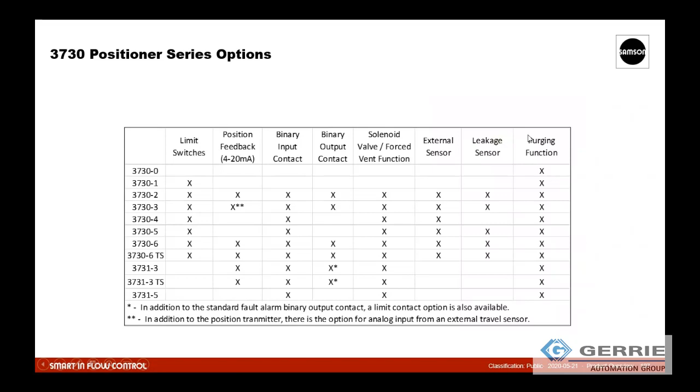Here you see the word Trovis View. Trovis View is actually the software that comes with these positioners that gives you advanced diagnostics. So some of the things you're going to get from Trovis View would be complete valve history, local errors, travel, and deviation. So I mentioned earlier that let's say we have a plug and seat issue. That could be picked up by the travel deviation only because, well, now it's traveling a little bit more to hit 50%. So why is it traveling a little bit more?

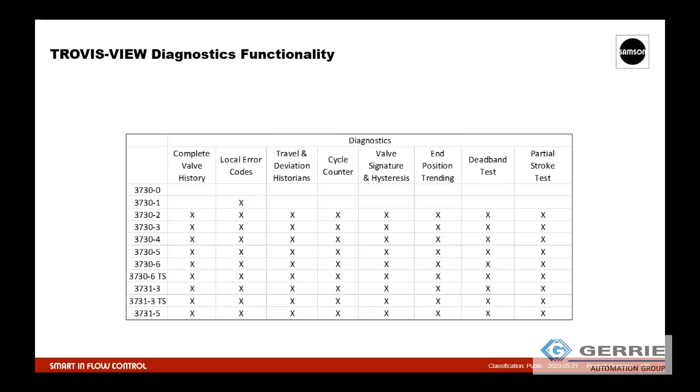Cycle counter. If a valve is supposed to be good for 1 million cycles and I'm only at 500,000 and I'm getting problems, what's going on? Or if I'm getting close to 1 million, I know that, okay, it's probably due for maintenance. Hysteresis, end position, deadband test, all this information is available through the Trovis View program. And it's very easy to just plug in or have that program work in conjunction with your own local historian.

Another beauty of our positioners is they can be mounted on not only different styles of valves, but other people's valves as well. So we have mounting brackets to mount on pretty much any valve configuration that you can think of. So should you have a valve where you go, geez, I'd really like to get a Profibus or a Foundation Fieldbus or a HART, but I don't want to change the valve, there's nothing wrong with the valve, then all you need to do is put one of our 3730 positioners on there.

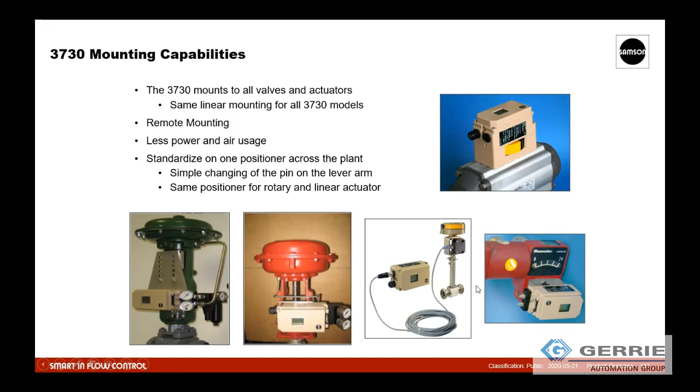So I've gone through a lot of different things. At the end of the day, what's important is sizing the valve. Sizing the valve is the most important because you want to make sure you have the right valve for the right application. So we want to know things like inlet pressure, outlet pressure, what's the media, what's the temperature, is it on-off, things of that nature, so that we can properly ascertain, are you going to have cavitation issues? Are you going to have flashing issues?

Again, we could have a situation where a customer has a 2-inch pipe, but it's sized out where it needs to be a 3-inch. Now we need to have a conversation going, okay, is there any chance of doing something different with the piping? Or we're going to have to put different types of cavitation and flashing trim in there so that we don't have any of these issues.

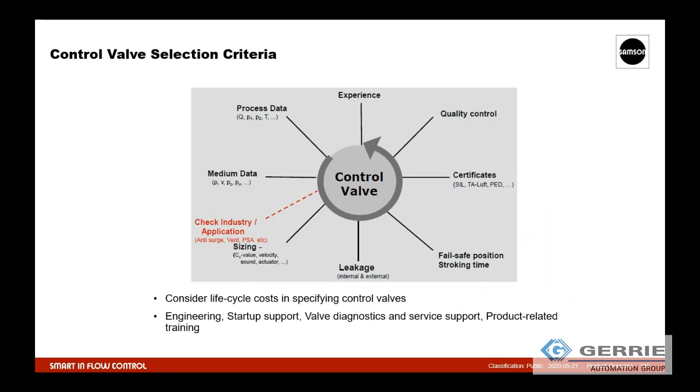To summarize, Samson takes a lot of pride in our manufacturing. We actually control over 90% of every part that's manufactured because we do it ourselves. So even as far as everything on a control valve, even the nuts, we do all those ourselves. So we have very tight quality control on all of the products that we manufacture. We want to make sure that if a customer or yourself purchases a Samson product, that it's in for a very long time.

My friends at Gerrie Electric and I ran into an application where we found this 4-inch steam valve at a customer's that had been there for 20 years, and it was still relatively working. It was sticking a little bit when the plug opened and closed, but they were still getting the controllability they needed out of it, and that was over 20 years. So that's definitely what we aim for. The total cost of ownership, making sure that you have a product that's going to last a very, very long time.